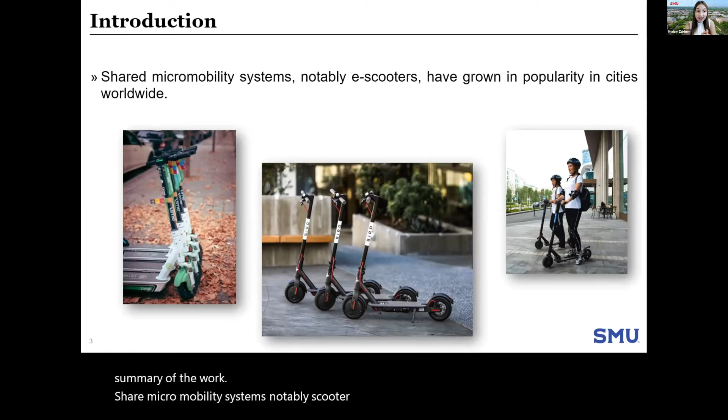So, shared micromobility systems, notably e-scooters, have grown in popularity in cities worldwide. The rapid rise of shared micromobility systems poses major challenges for cities, prompting some to prohibit the use of these services within their jurisdiction. Given the rapid growth of the micromobility industry, cities continue to seek strategies to support micromobility technology implementation. Thus, this research presents a roadmap for dockless shared micromobility vehicle data analysis, including a suite of tools necessary for the successful deployment, integration, and management of micromobility services.

So micromobility usage has grown significantly in the United States over the last few years, as 48% of all trips are less than 3 miles. As shared micromobility services have grown rapidly and almost without any warning, there were few studies about micromobility services. As such, cities and DOTs have struggled to manage these services. The challenges associated with the introduction of these services were related to parking practices causing clutter issues and parking blocking, and driving behavior causing safety issues.

This paper tackled parking and infrastructure challenges by offering 2 techniques for analyzing areas of high parking demand and high-use roadway segments. These analysis processes are applied to data sets consisting of tens of thousands of e-scooter trips completed in Dallas, Texas. This paper contributes to the literature by presenting methods to enhance the effectiveness of dockless vehicle services, address problems created by these services and achieve better implementation performance. Additionally, the paper presents a detailed comparison of common methods used in high-use streets identification.

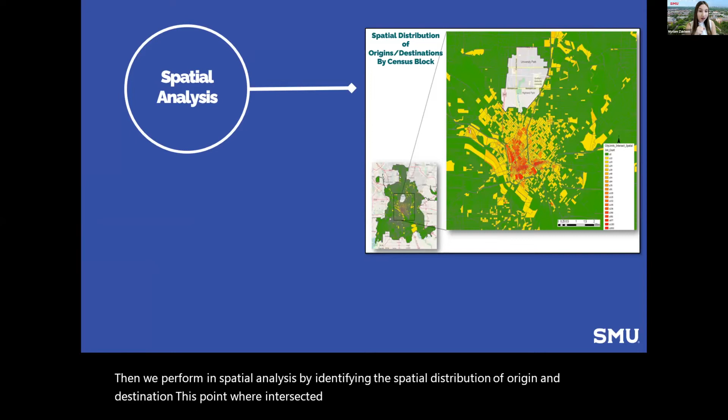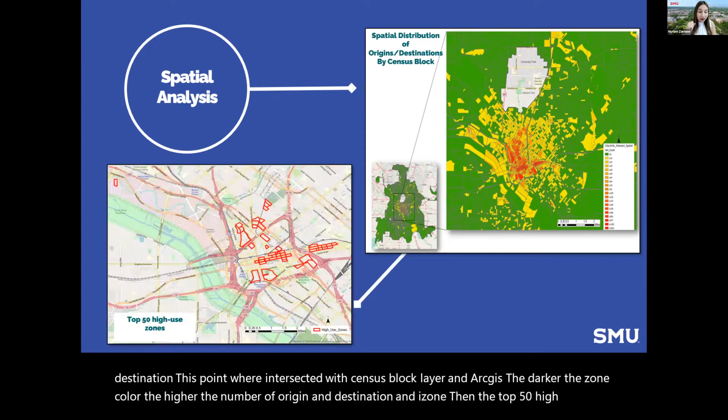Then we performed a spatial analysis by identifying the spatial distribution of origins and destinations. These points were intersected with the census block layer in ArcGIS. The darker the zone color, the higher the number of origins and destinations in a zone. Then the top 50 high-use zones are identified. Three main areas are identified as having high e-scooter use: the downtown area, uptown, and the entertainment district.

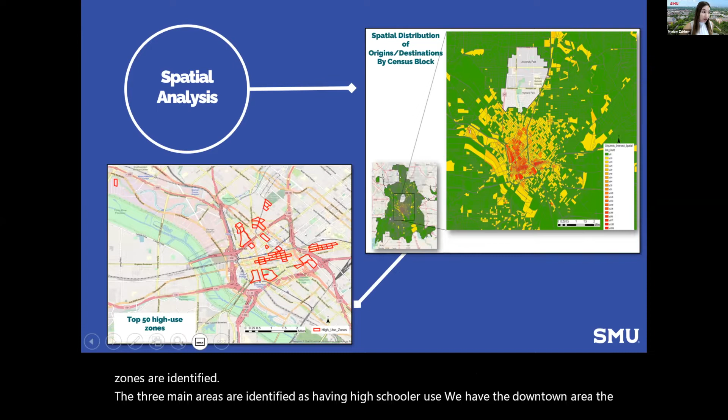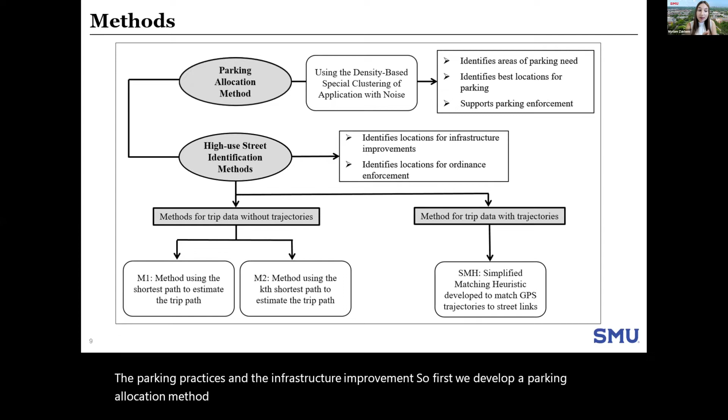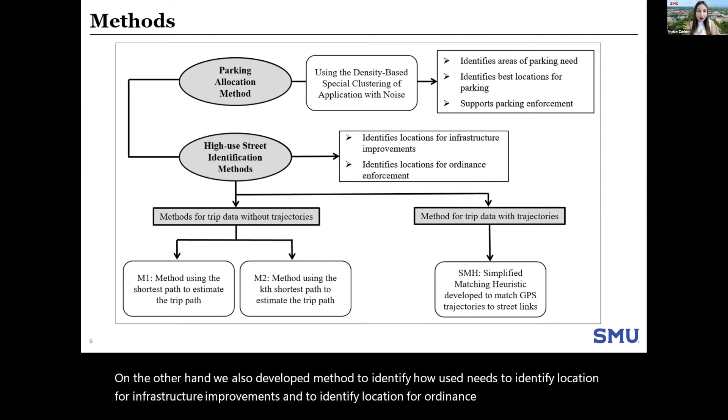So the methodology implemented in this paper addresses two identified micromobility challenges: the parking practices and the infrastructure improvement. So first, we developed a parking allocation method using density-based spatial clustering of applications with noise, also known as DBSCAN, to identify areas of parking need, to identify the best locations for parking, and to support parking enforcement. On the other hand, we also developed methods to identify high-use streets, to identify locations for infrastructure improvements, and to identify locations for ordinance enforcement. All these methods will be elaborated more in the next slides.

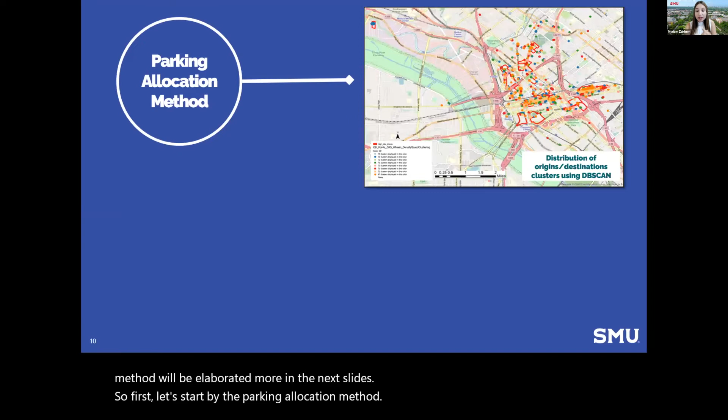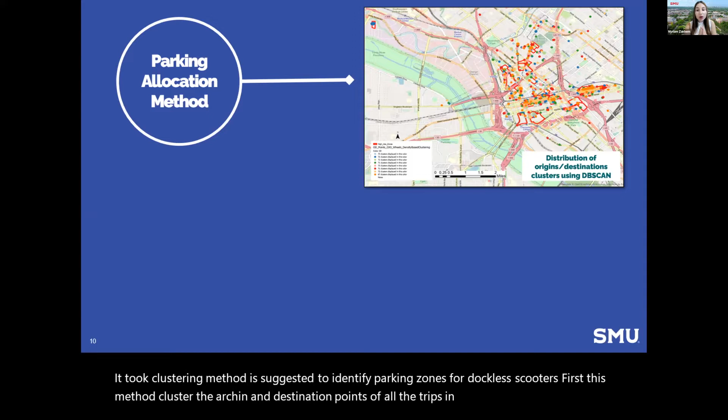So first, let's start with the parking allocation method. A trip clustering method is suggested to identify parking zones for dockless e-scooters. First, this method clusters the origin and destination points of all the trips in the dataset using DBSCAN and ArcGIS in order to identify the candidate parking sites.

In addition to examining candidate parking sites, morning launch sites, or locations at which e-scooters were positioned or launched in the early AM hours of the day, were analyzed. The launch site can be deduced by clustering the origin of morning e-scooter trips extracted from the dataset provided by each vendor. The launch site analysis of each vendor was performed to ensure that parking infrastructure is installed at each vendor's launch site.

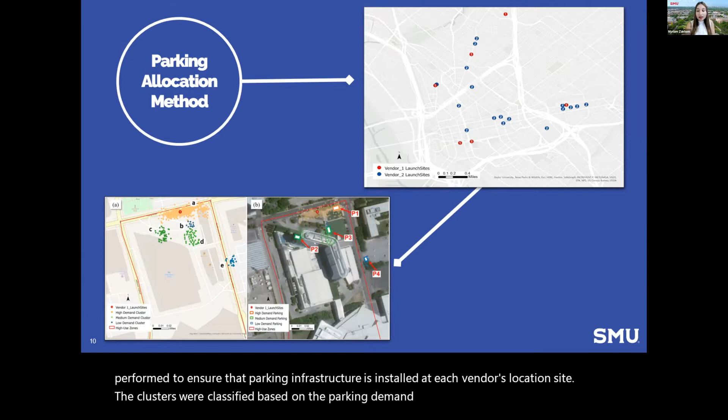The clusters were classified based on the parking demand level. Parking demand level was determined by examining the number of e-scooters parked at a cluster site per day. We identified three levels: low, medium, and high e-scooter parking demand. The thresholds were 1 e-scooter per day for low, 2 to 3 e-scooters per day for medium, and 4 or more e-scooters per day for high.

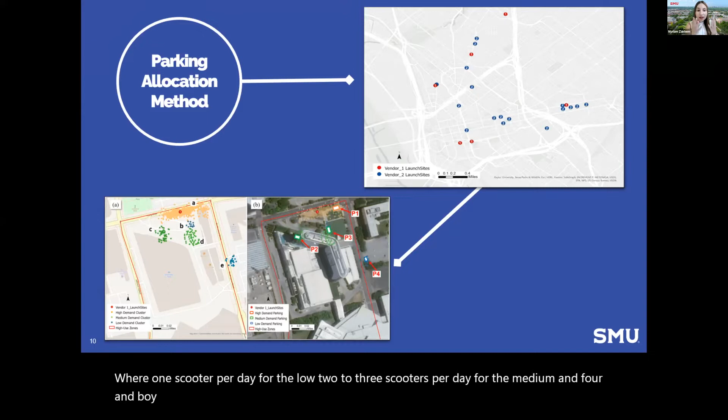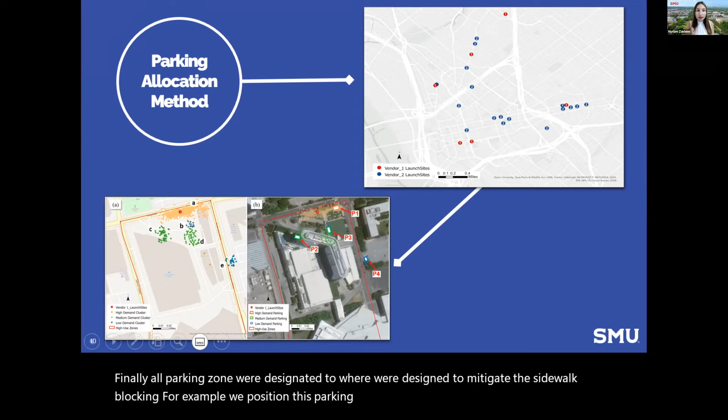Finally, all parking zones were designed to mitigate sidewalk blocking. For example, we position these parking locations on sidewalks that have high widths in order to avoid blocking the right of way of pedestrians.

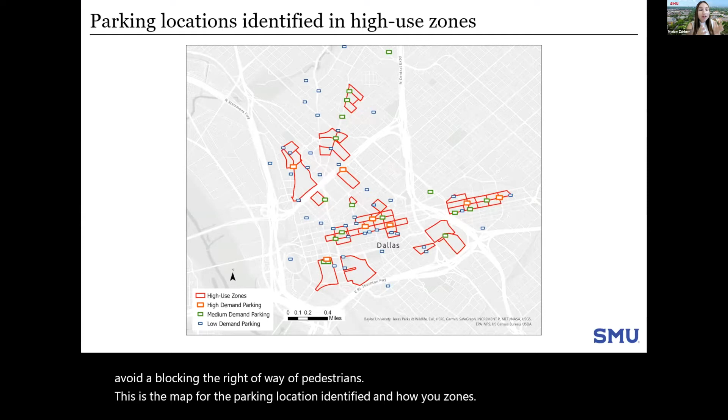This is the map for the parking locations identified in high-use zones. If financial resources allow, we recommend cities add all the identified parking sites: high, medium, and low demand. If municipalities face budgetary constraints, they can consider adding the low demand parking sites just in case high or medium demand parking sites are not available within high-use zones.

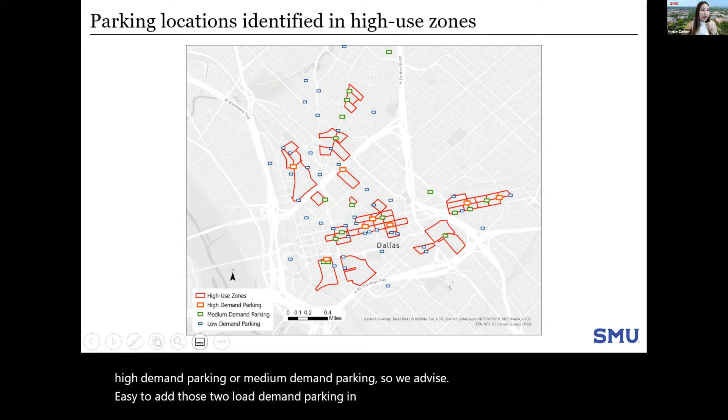For example, let's take this high-use zone. We don't have any high demand or medium demand parking, so we advise the city to add those two low demand parking sites in order to mitigate the cluttering issue of e-scooters.

So this paper also seeks to identify high-use corridors using e-scooter trip data, and we compare various techniques used in prior studies to identify corridors. E-scooter companies in general provide cities with two types of data. The first one is data without trajectories, where just the origin and destination points are provided for each trip. In this case, two methods were proposed to estimate the path taken by each trip: the shortest path method and the k-shortest path method.

The second type of data is trip data with trajectory, where we have GPS points along the route taken by an e-scooter rider. So a method is developed to join trip data, the trajectories, to street segments in order to identify which streets were used by the rider, and in order to identify the high-use street corridors at the end.

So let's elaborate more on the first two methods. For trip data without trajectories, they use the following algorithm. This algorithm uses the shortest path algorithm using Dijkstra. So the developed algorithm enumerates in ascending order a set of paths between the origin and destination. And then it assigns for each trip either the shortest path, which is the first element in the path list, or the k-shortest path having a travel time equal to the actual trip duration.

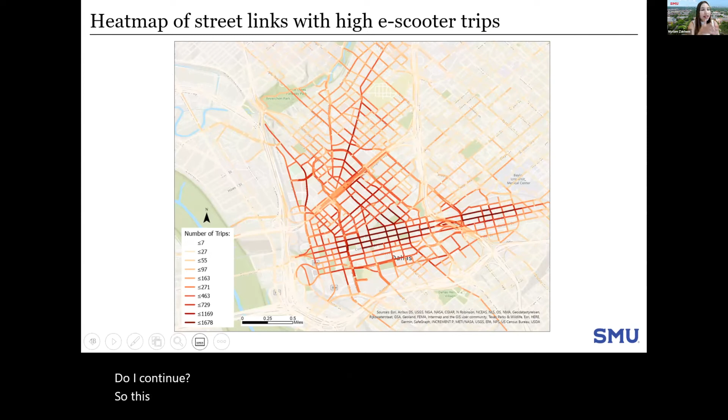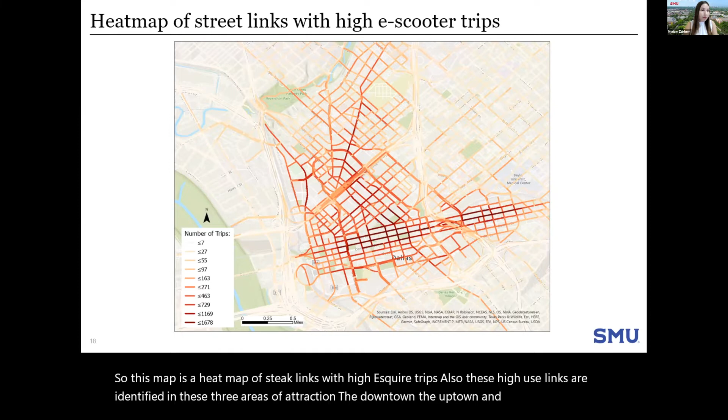So this map is a heat map of street links with high scooter trips. These high-use links are identified in the 3 areas of attraction: the downtown, the uptown, and the entertainment district. In this paper, we also discuss solutions that can be implemented to enhance micromobility services, such as adding painted corrals and bike racks at the identified parking locations. At the high-use corridors identified, road infrastructure improvements can be added, such as bike lanes. Furthermore, these corridors represent the best locations for ordinance enforcement.

To sum up, this paper provides a method for analyzing areas of high parking demand, identifies e-scooter vendor launching sites, provides techniques for analyzing roadway segments of high micromobility demand, discusses policies, implications and potential environmental impacts, and examines the accuracy of shortest path models in predicting e-scooter paths.

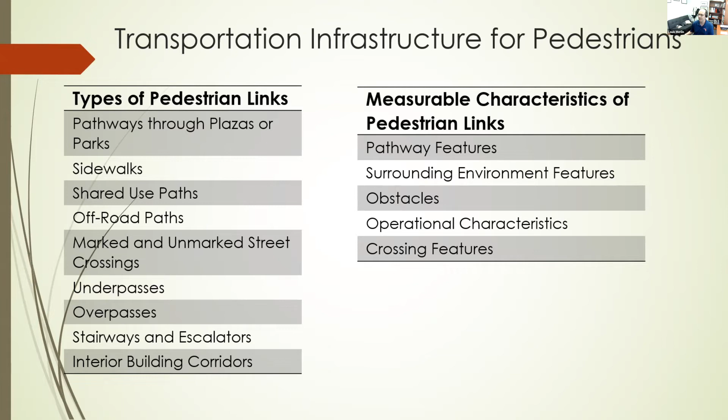So first, transportation infrastructure. How do we measure it, and what does it include? It's not just sidewalks. There's also off-road paths, shared use paths, underpasses, overpasses, street crossings, stairways. And then there's literally dozens of variables that you can consider, things such as the surface, the slope, the presence of obstacles, the presence of orientation features, the presence of benches. This is just a summary of the kinds of variables that are available for pedestrian infrastructure, but there are dozens of variables that you can gather that are relevant. Many more than there are for streets, because pedestrians are influenced by micro-scale features of the built environment.

Our general findings for the transportation dimension is that most of these studies, even though they studied pedestrian accessibility, actually had a lack of adequately detailed data about the pedestrian network. In fact, the most common approach is just to use the roadway network, remove some links that are highways or limited access roadways, and use that. And clearly that's not ideal for analyzing pedestrian accessibility. In a handful of cases, I'd say less than 10, researchers went to substantial trouble to construct extremely detailed pedestrian networks, including things like overpasses, underpasses, building entrances, and so forth. But that was, again, very rare.

And then the pedestrian network itself actually interacts with the individual dimension. The pedestrian network and the data you need depends upon the user type. So if you're focused on wheelchair using persons, you actually need to gather somewhat different types of data. And walk accessibility, when you calculate it, unsurprisingly depends upon the pedestrian network that's gathered. So gathering an accurate pedestrian network is important.

Next, I want to discuss the land use dimension. Land use features in 3 different ways: the location of origins, the location of destinations, and the built environment context along a given route. For origins, we saw residences used, particular individual buildings used, and in some cases, any possible location throughout the city used as a possible origin.

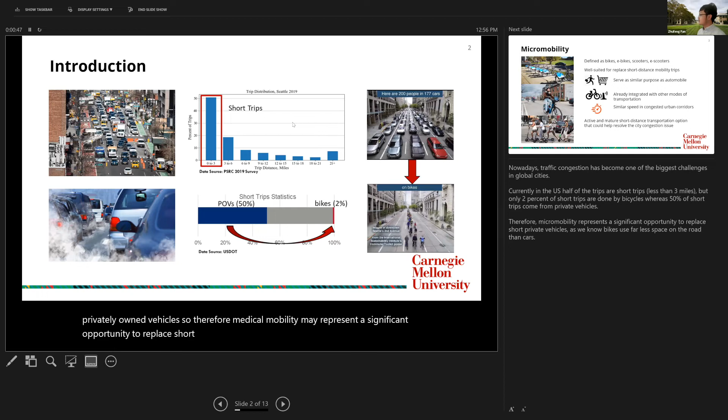Nowadays, as we know, traffic congestion has become one of the biggest challenges in global cities. Currently in the US, half of the trips are short trips, meaning less than 3 miles, but only 2% of short trips are done by bicycles, whereas 50% are made by privately owned vehicles. So therefore, micromobility may represent a significant opportunity to replace short private vehicle trips because bikes use far less space than cars on the street.

Micromobility, defined as bikes, e-bikes, scooters, e-scooters, is pretty suitable for replacement of short car trips. First, it can serve a similar purpose as cars for shopping and commuting as daily use, and it's already integrated with some other modes such as public transit. And it can achieve a very similar speed in congested urban corridors. So it can become a more active and mature short distance transport alternative to private vehicles and could help us resolve the city congestion problems.

And in this research, we answered two main questions. First is, what is the upper bound potential for micromobility to replace short car trips? And second is, what are the resulting impacts to congestion and energy use and emissions from the mode replacement strategy?

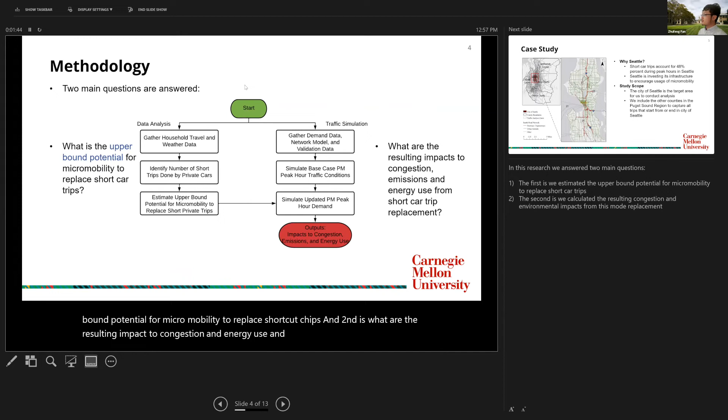We answered the two questions by performing a case study in Seattle, because Seattle is one of the cities with the greatest potential for micromobility usage, as short car trips account for half during PM peak hours, and Seattle is investing a lot of money in its bike infrastructure to encourage micromobility usage.

And the whole study area covers the whole Puget Sound region. It's the whole Seattle metropolitan area, and Seattle is the target area for us to conduct traffic analysis. And we also include other surrounding counties in order to capture all the trips that start from and end in the city of Seattle to generate a more comprehensive traffic analysis result.

We use the PSRC, that is the Puget Sound Regional Council household survey data, and weather data to estimate the upper bound potential for replacement. The potentially available trips that can be replaced are short trips made by private vehicles occurring in PM peak hours. And these trips have to satisfy some conditions to be replaced.

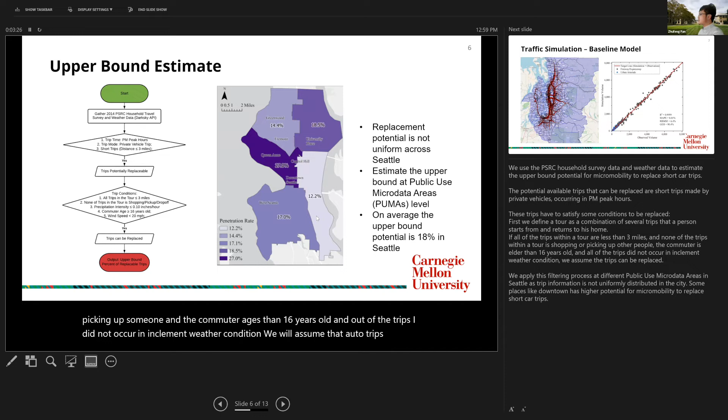First, we define a tour that is a combination of several trips that starts from a person's home and returns to his home. If all of the trips within a tour are less than 3 miles, and none of the trips within a tour is shopping or picking up someone, and the commuter age is older than 16 years old, and all of the trips did not occur in inclement weather conditions, we assume that all the trips in this tour can be replaced.

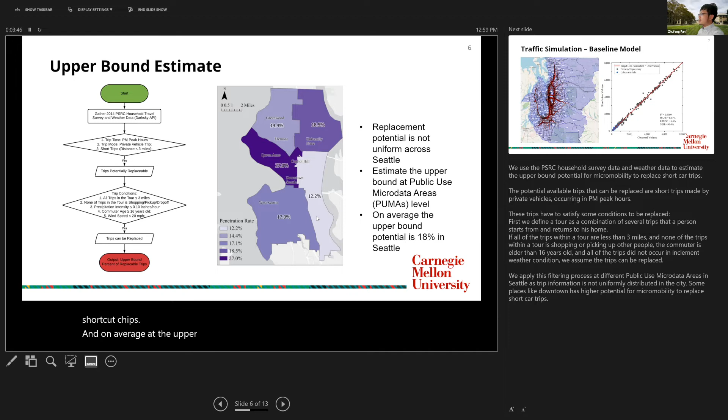And we apply this filtering process at different regions in the city of Seattle, because trip information is different across different regions, and the downtown area may have higher potential for micromobility to replace short car trips. And on average, the upper bound potential, as we estimated, is about 18% in the city of Seattle.

After getting the replacement rate, we perform traffic simulation models to compare a normal case with some cases where some trips are replaced. The traffic simulation is conducted using the planning software called Visum. The first step is to reproduce the 2014 traffic condition using PSRC's travel demand model. A static traffic assignment is made to allocate traffic volumes that start from or end in the traffic analysis zones.

We calibrate the model by using the T-Flow Fuzzy function to adjust the demand matrix in order to match the observed traffic counts on street segments with the simulation values. And as we can see, in terms of all the metrics we are using, the baseline model is able to reproduce the traffic volume in Seattle.

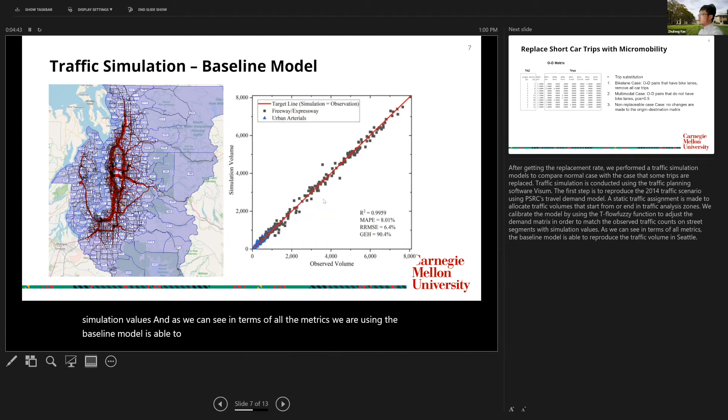And mode substitution is done with the demand matrix. Demand is an OD matrix, which details the number of trips by different modes for each TAZ origin-destination pair. And for each origin-destination pair whose traveling distance is short, we consider the following cases for replacement.

So if there exists a designated or protected bike-lane route between origin and destination, we assume that bike trips would not affect the private vehicle traffic stream on vehicular roads and remove all the trips from the trip table.

If there is no designated bike lane, but there exists a route between origin and destination, and bikes are allowed to share roads with cars, the replaced short vehicle trips will be converted to 0.5 passenger car equivalent following the Highway Capacity Manual, and micromobility trips are simulated as cars in the model.

And if there is no possible cycling route in the road network between origin and destination, we assume that the short vehicle trips cannot be replaced by micromobility, and as a result, no changes are made to the origin-destination matrix.

By comparing results from every traffic simulation scenario, we can observe that mode replacement can help alleviate the traffic congestion issue. And we use the ratio of simulation speed versus free flow speed as the congestion evaluation metric. Travel speed increases as micromobility penetration rate increases, especially at the most congested areas, such as a stop sign, yield sign, or traffic light in urban corridors.

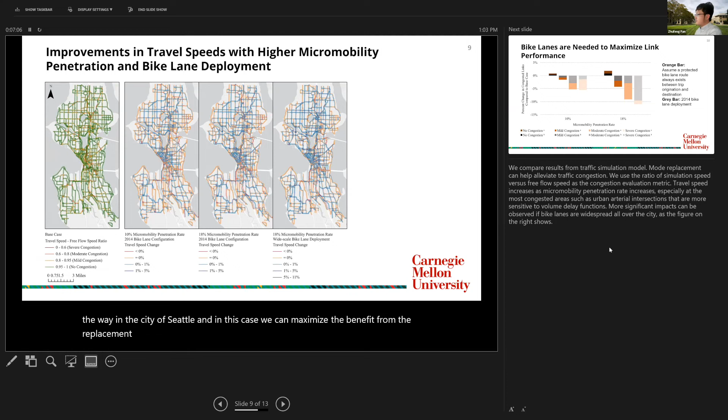And this map can be translated to a bar chart. It shows the percentage change of the number of road segments under different congestion levels. The orange bar is the case where we assume there always exists a protected bike lane between origin and destination. And the gray bar is the 2014 bike lane deployment, which we use for our baseline model.

At the upper bound potential, the number of severely congested roads decreased about 10%. And if bike lanes are widely deployed, as the orange bar shows, the improvement can be much more significant. So even though we can see significant impacts in terms of traffic congestion, the environmental impacts are disproportionately low, as we can see from the table.

At the upper bound replacement rate, 8% of total trips are replaced, but only 2% of the emissions and energy use are saved. This is because micromobility is not a carbon neutral mode, and given that the replaced trips are short, and short trips will not produce too much emissions.

So in conclusion, in this research, we first estimated the potential for micromobility to replace short car trips during PM peak hours. On average in Seattle, the upper bound is 15%. And we can observe significant congestion reduction, and bike lanes are needed to realize the full benefits of micromobility replacement.

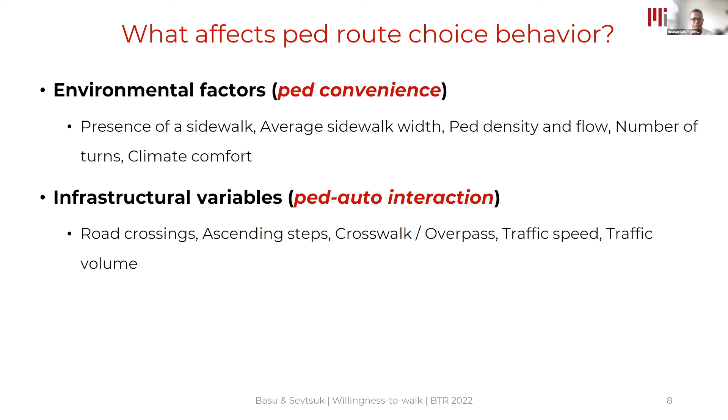Then you have the experience along the route, which could make certain routes more interesting. For example, you could have lots of amenities and storefronts. Pedestrians could have access to greenery. They could use those routes to get to transit stations, or there could be interesting public places along those routes, such as artworks or fountains or monuments and so on.

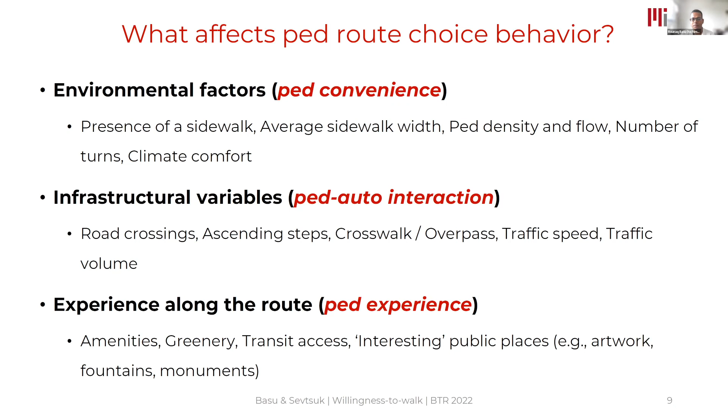And this is not as much something that the literature has focused on in one particular area, but if you start to make comparisons across areas, then terrain can matter, especially comparing across cities with very different elevations along the routes. And this can be interacted with climate, where pedestrians would be less likely to walk or travel shorter distances in places with hot climates.

And then we have subjective factors. So all of these variables that I was just describing are objective factors, which we can measure using, let's say, route audits. But if we were to measure pedestrian perceptions of certain routes, then we'd need to go out into the field and conduct surveys regarding how they feel about the crime safety, the comfort, the familiarity along certain routes and neighborhoods, or the noise.

So what's the research gap over here? Prior studies, such as the ones I just discussed, have been based on limited data. And how so? Well, they're focused mostly on niche samples, with a very limited definition of study area. For example, folks have looked at places around transit stations, or focused only on the downtown area. And these data, because of funding issues and data collection issues, were collected only over a few weeks.

So we don't have good continuous data that stretches out over multiple months or years, where we can try to look at seasonality effects. And because of all of these obstacles, sample sizes have been quite limited compared to other route choice modeling efforts focused around automobiles, for example. And across these different studies in the literature, we've found there are vast differences in data collection techniques and modeling frameworks, and these differences do not allow us to compare results across different cities, and that's really important for policymaking.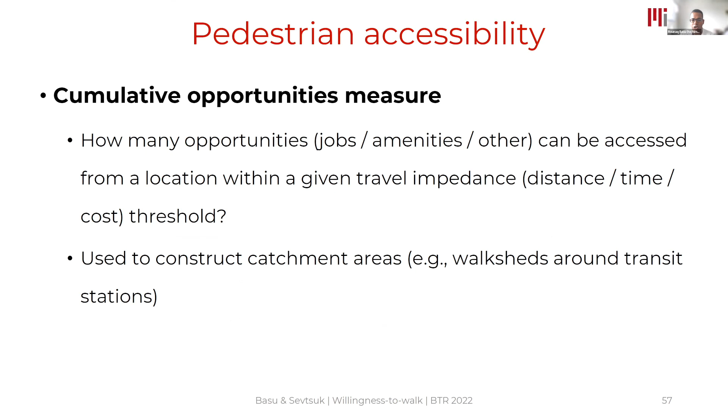So when we think about routing options, obviously you could make choices along what network you want to use, as well as the mode you want to use. For this analysis, we are obviously going to stick to pedestrians. But when we think about routing options, then we could be looking at the Euclidean distance. So you start off at a point and you assume some Euclidean distance, which could be, let's say, 1 kilometer. And because it's Euclidean distance, it's going to be uniform in all directions. And what you end up with is a circular catchment.

But instead of Euclidean distance, if you were to use network distance, then the distances along different directions wouldn't be uniform, and you'd end up with a very non-uniform catchment area or walkshed that would have these jagged edges.

But both of these... sorry, Rounaq, we're almost on the time, so just I'll wrap up.

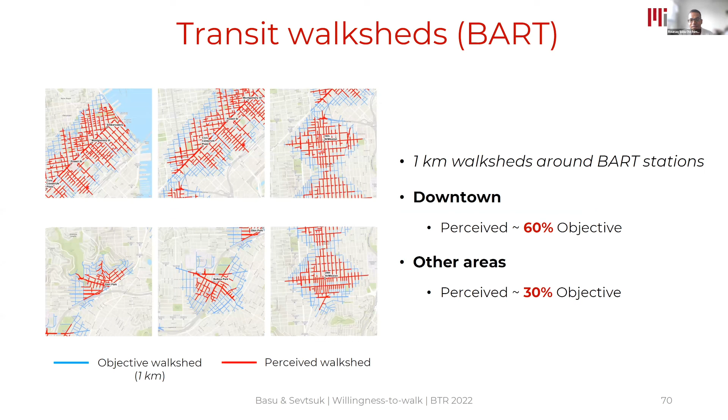So thanks. So in terms of operationalizing these, Euclidean and network distance catchments have been used and are being used, but what's not being used is perceived distance. So can we use the route choice preferences that we just analyzed and plug that into this accessibility analysis so we can get perceived distance along the network instead of objective distance that does not account for what's happening along the route? And we did that for the BART system in San Francisco, where we found that the perceived accessibility is 30% that of objective accessibility in areas outside of downtown. It's better in downtown. And in Boston, we looked at the MBTA and we found that it's less than 50% of objective accessibility.

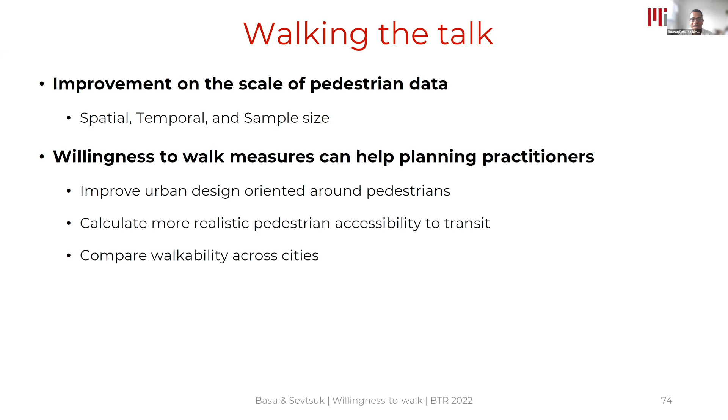So to summarize, in these two studies, we tried to improve on the scale of pedestrian data, both in terms of the spatial, temporal, and sample size representation. And these willingness to walk measures can help planning practitioners improve urban design oriented around pedestrians, prioritize which particular variables need to be looked at for infrastructure improvements, calculate more realistic pedestrian accessibility to transit, and compare walkability across cities. But obviously, limitations remain when we use big data sources. For example, we could not compare across socioeconomic groups, which means that we need to supplement these types of sources with targeted surveys of underrepresented groups.

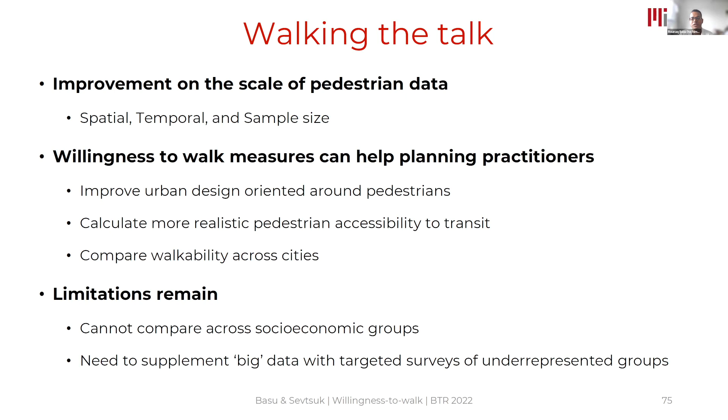Both of these papers are published. One of them got this award from Travel Behavior and Society, so you're free to read them up. And with that, I'll open the floor up for questions, and thanks for your attention.

Thank you so much, Rounaq. Very interesting work. We have some questions in the chat by Louis. So the first one is, how do you define and count amenities? So we looked at different establishments along the route and just counted them up. And these data are available from any form of business databases, for example, Esri Business Analyst.

Thank you. And the next question is, do you have any reason why pedestrians in San Francisco would be more sensitive to traffic? Yeah, we thought a lot about that, and it may boil down to a measurement issue. So in Boston, throughout the city, there are very strict speed limit laws. And because of that, we didn't observe a lot of variation in our route data across the traffic speed and traffic volume variables, which is why that lack of variation could have led to the effects being statistically insignificant.

Okay, thank you. And then Vince is asking, did you consider the number of street crossings? No, we did not. So building off of Louis's earlier recommendations, that's something that's definitely worth looking into. We have efforts going on where we're trying to create pedestrian street networks using satellite imagery. We did augment the street network from the TIGER/Line shapefiles with some data from OSM as well, but because this is historical data, it's a challenge to maintain temporal consistency.